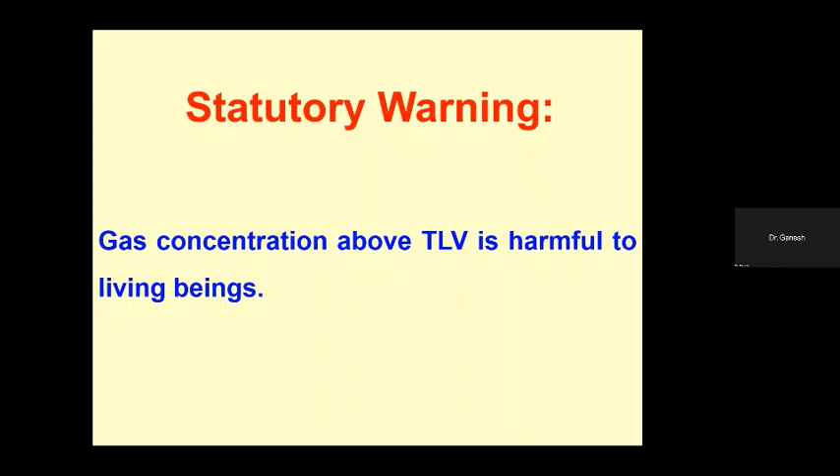Just about the statutory warning: gas concentration present in the environment above TLV is harmful to living beings. This is the introductory part about the gas sensors. So what is the environment? The environment is the imperceptible relationship between nature and the human mind.

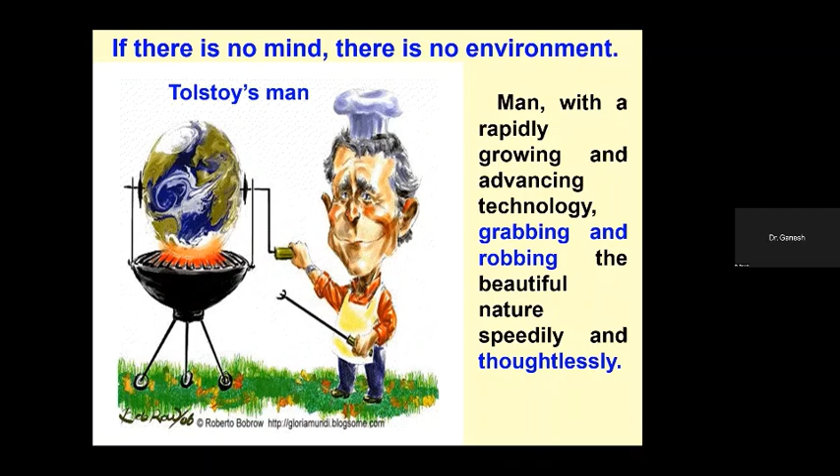And when the atmosphere contains a concentration of pollutants that produce objectionable effects, we call that pollution. Friends, environment is related not to us, but to the human and its mind. If there is no mind, there is no environment. See, this is Tolstoy's man. He is baking the earth as a whole.

That is rapidly growing and advancing technology, grabbing and robbing the beautiful nature speedily and thoughtlessly. So, what is the result of this grabbing and robbing of the beautiful nature? The explosive growth of environmental pollution that we are facing, with many problems such as global warming, the major problem that we are facing nowadays.

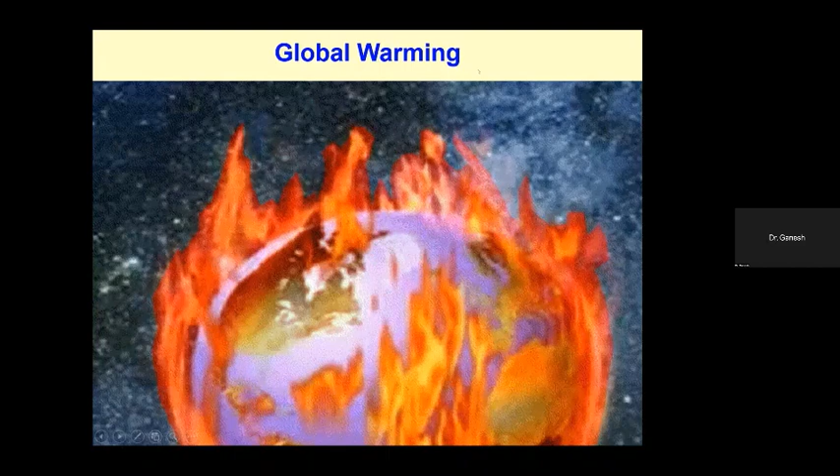So here we come across many gases present in the environment that we must detect. We categorize the hazardous and toxic gases into three types. First is combustible gases; we come across explosion and fire hazard from such gases. Then toxic gases and oxygen displacing gases. So let us see the combustible gases.

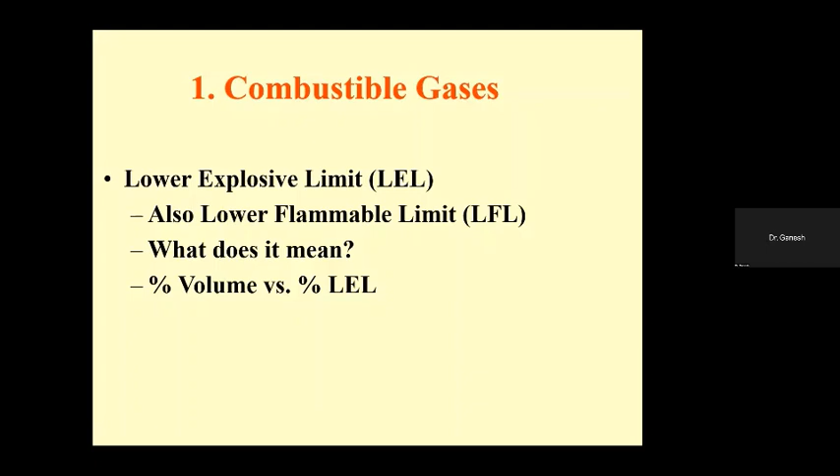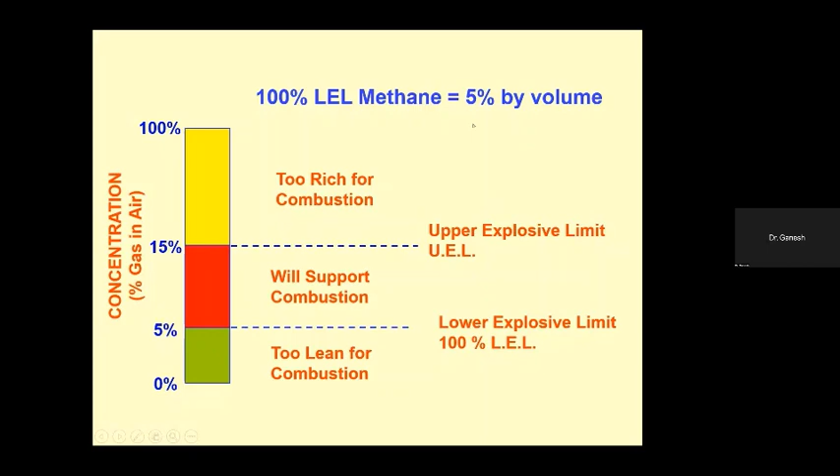For combustible gases, there is one term, the lower explosive limit. When the gas molecules exist in the environment in the specified limit, it is harmful to the environment and living beings. 100% LEL, lower explosive limit, of methane means 5% by volume. From 0 to 5%, it is too lean for combustion, and that is called the lower explosive limit, that is 100% LEL.

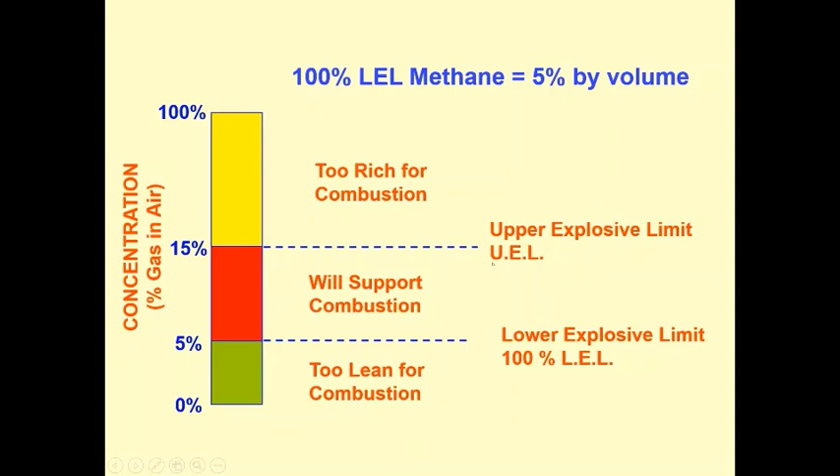If the gas leaks above 5% in the environment, then it supports combustion. Above 5%, the gas supports explosion and combustion. Above 15% by volume, the gas has crossed the upper explosive limit, that is too rich for combustion. The same case is found with pentane. Pentane has 1.5 volume percent as 100% LEL and 7.8% as 100% of the upper explosive limit, UEL.

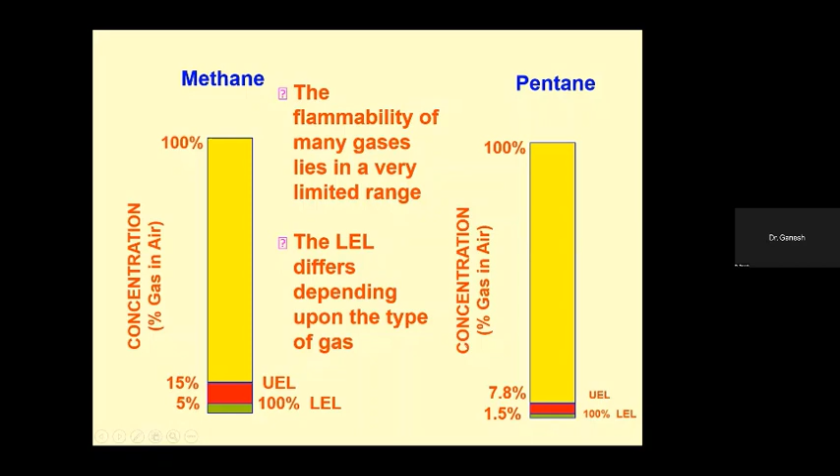Second one is toxic gases, a hazard to human health and life safety. Toxic gas is measured in ppm; it does not affect if it leaks below the threshold limit value, which is measured in parts per million, ppm. 1 volume percent of toxic gas equals 10,000 ppm, or 1 ppm is equal to 0.0001% by volume. So this is about the concentration of the gas which leaks in the environment.

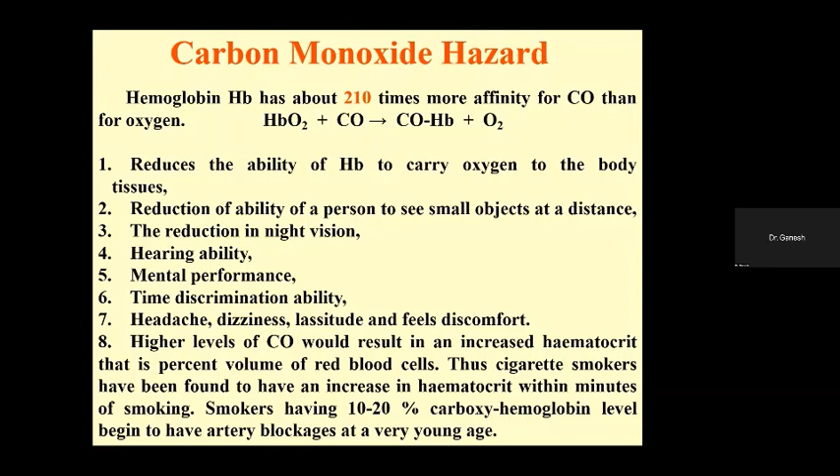We lose oxygen from our body, and therefore we face many problems such as reduced mental performance, hearing ability, night vision, time discrimination ability, headache, and dizziness from carbon monoxide. If 100 ppm of carbon monoxide leaks in the environment, then fatigue and feeling tired. Above 400 ppm, headache within 1 to 2 hours, dizziness, nausea. If it leaks above 3200 ppm, death may occur within 30 minutes. So this must be avoided. Such gases must be detected.

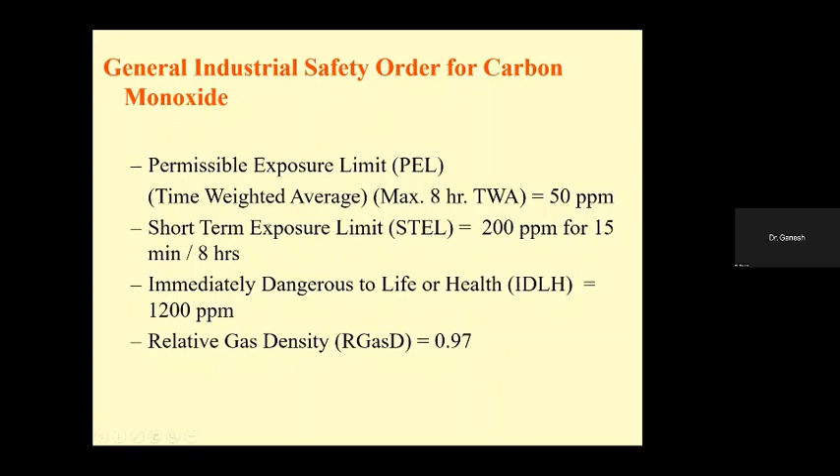So what is the general safety order for carbon monoxide? The permissible exposure limit, time weighted average, is 50 ppm for 8-hour exposure. It means that if a human is exposed to 50 ppm carbon monoxide within 8 hours, it can be tolerated, but above 50 ppm it cannot. The short-term exposure limit is 200 ppm for 15 minutes per 8 hours. If 15 minutes of exposure to 200 ppm happens per 8 hours, it is tolerable. Otherwise, it is dangerous to humans.

Next one is chlorine hazard. Like carbon monoxide, chlorine is also hazardous to living beings. It is used in water purification, sanitation of industrial waste, swimming pools, bleaching of pulp and textiles, manufacture of various chemical compounds, and so many things. When chlorine gas comes in contact with moisture, a hazardous chemical forms, called dioxin, and death may occur if exposed to 100 ppm for a few breaths.

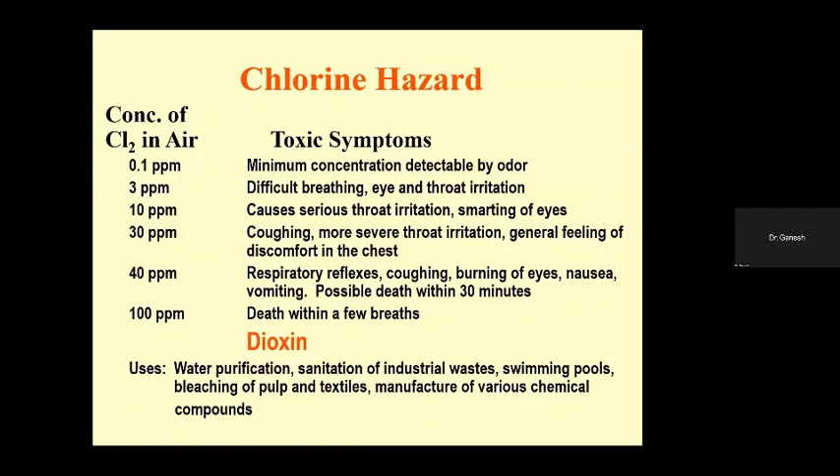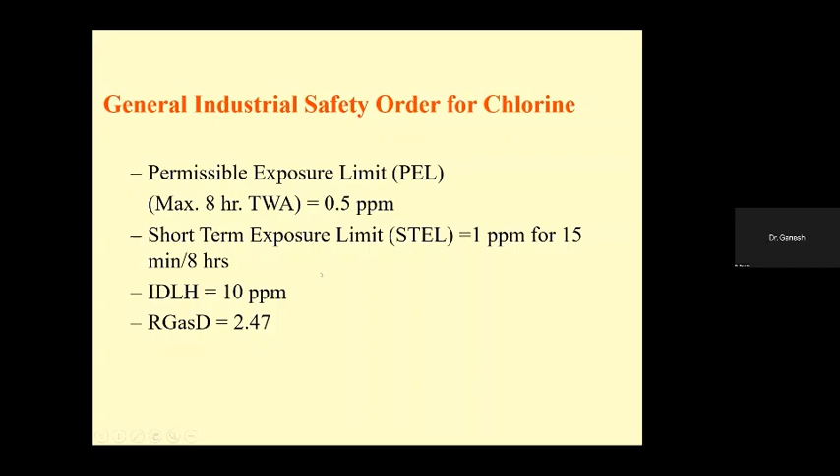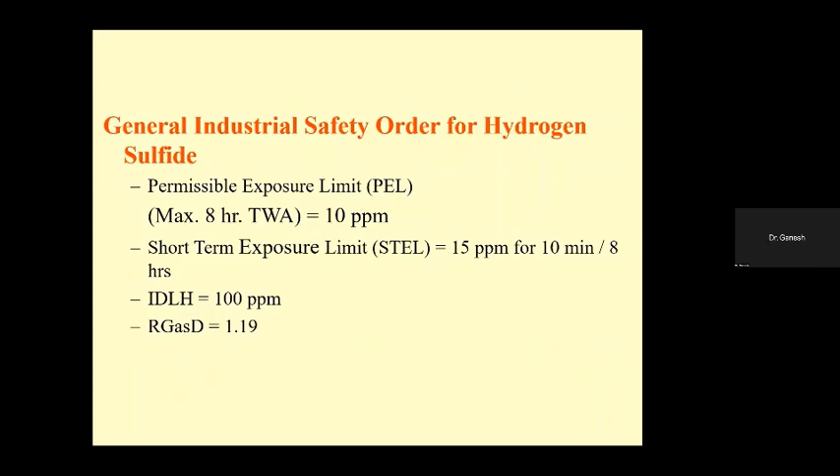Then its permissible exposure limit is 0.5 ppm for maximum 8 hours. Its short-term exposure limit is 1 ppm for 15 minutes per 8 hours. Then hydrogen sulfide. Likewise, hydrogen sulfide 1 ppm also produces irritation of the respiratory tract and odor is detected. Up to 10 ppm, it is allowable for 8 hours exposure, and above it is not tolerable. So its permissible exposure limit is 10 ppm for maximum 8 hours.

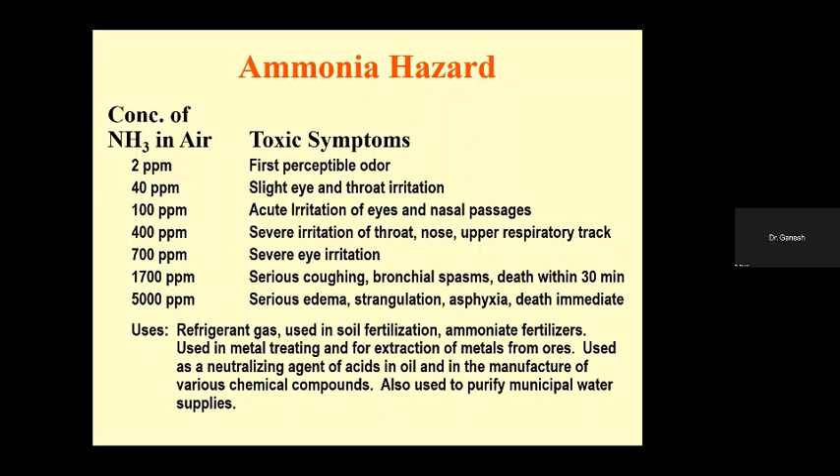Likewise, ammonia 2 ppm, 40 ppm, and many. If ammonia is leaked in the environment by any mistake or by industries, then many side effects on humans can occur. Its permissible exposure limit is 25 ppm and short-term exposure limit is 35 ppm for 15 minutes per 8 hours.

Similarly, gases containing sulfur, meaning sulfur dioxide and sulfur trioxide, may cause difficult breathing, may strain the victim's heart, bronchitis and lung cancer. It destroys plant cells, and many more hazardous effects we come across.

Likewise, ethanol is also hazardous to living beings. Pure ethanol is called absolute alcohol. Ethanol is used for beverages, scientific and industrial purposes. Though it is hypnotic, it depresses the activity of the upper brain, even though it gives the illusion of being a stimulant. It is toxic like methanol, and abuse of ethanol, methanol, or any other alcohol is a major drug problem in most countries.

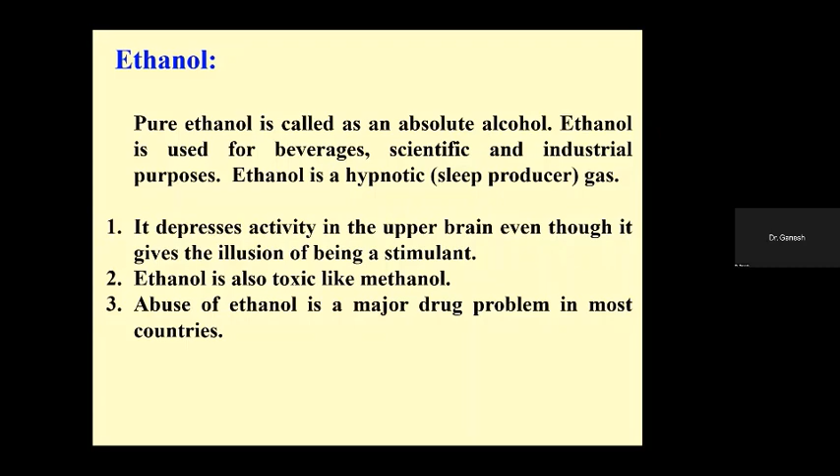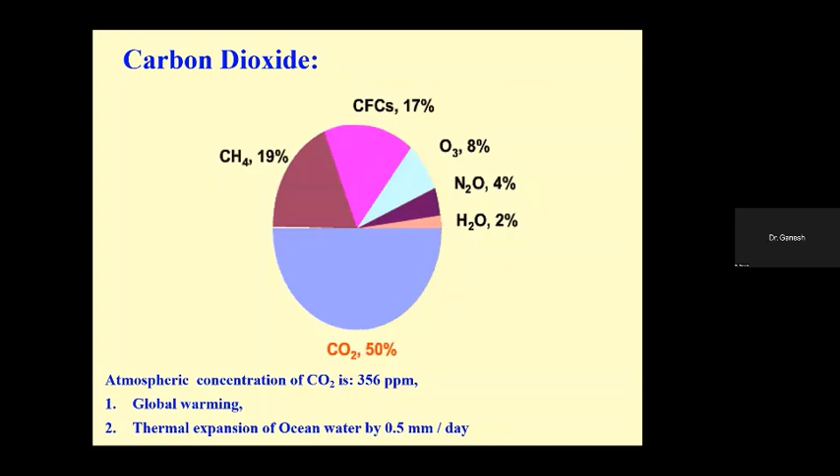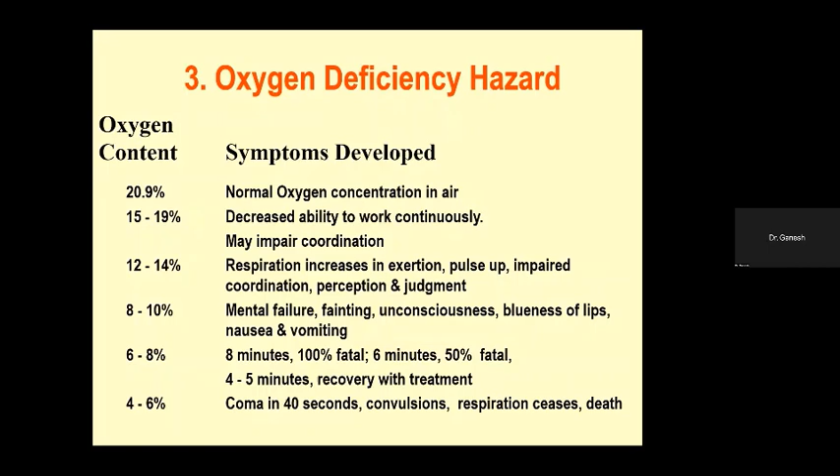This is the carbon dioxide hazards. So, carbon dioxide alone is 50% responsible for global warming. Then oxygen deficiency hazards. Normal oxygen concentration in air is 20.9% by volume. If this volume gets decreased or increased, many more effects we come across. Breathing gear required above 19.5% and below 23.5% oxygen content in air.

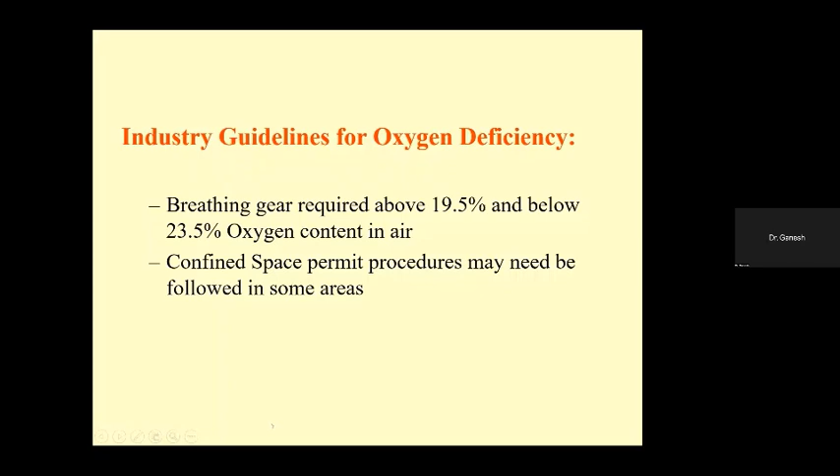So let us see what is a sensor. A sensor is an electronic device which responds to physical quantities, whether it may be gas concentration, temperature, pressure, or displacement. These physical quantities are converted into electrical variations. That device is called a sensor. It is also defined as any device that converts a signal from one form to another form.

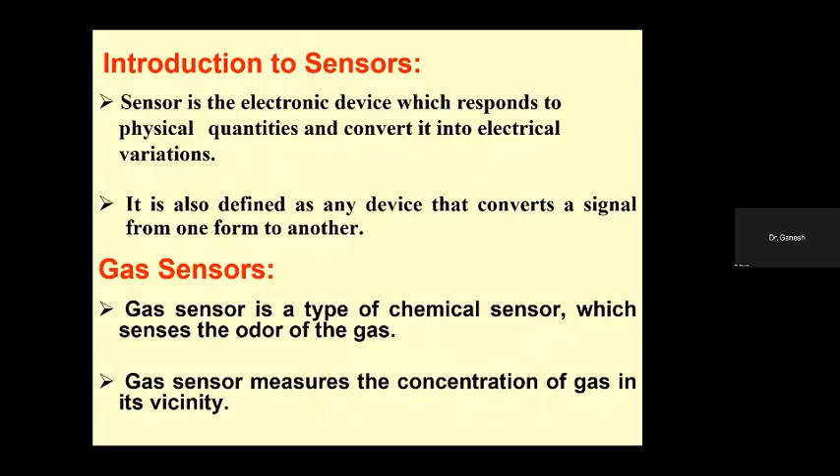And a gas sensor is a type of chemical sensor which senses the odor of the gas. Just as a nose, it senses the odor of the gas and gas concentration. A gas sensor measures the concentration of the gas in its vicinity, meaning exposure. So a sensor is the input device of any system. If we consider the public address system, the input device is the microphone, that is called a sensor.

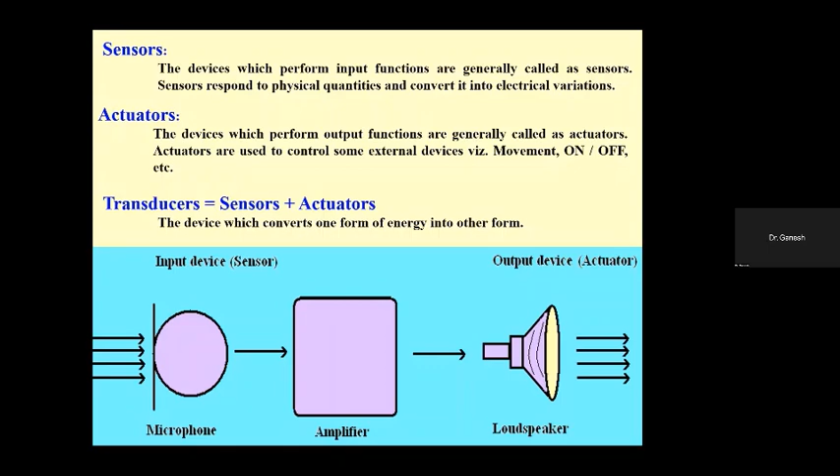And an actuator is the output device in the system. In the public address system, the loudspeaker is the output device, so it is called an actuator. The signal transformation from input unit to output unit is called transduction, and the whole system is called a transducer.

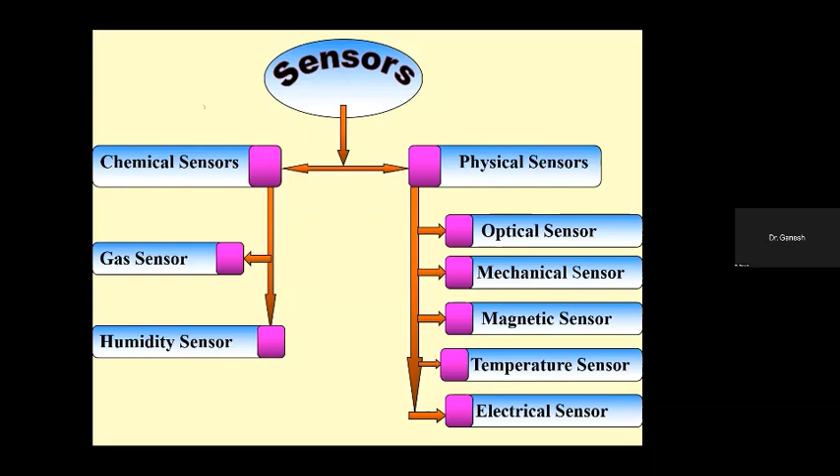So there are a number of types of sensors. Basically two types, chemical sensors and physical sensors. The two types of chemical sensors are gas sensor and humidity sensor. For physical sensors, we find the optical sensor, in which light rays, wavelength or characteristics of light are measured. In a mechanical sensor, pressure can be measured. In a magnetic sensor, magnetic field and magnetic flux are measured. Temperature and electrical sensors are also physical sensors.

So what is the need of these sensors? We come across a few of the cruelest episodes, like the methyl isocyanate gas leaked in India on December 2, 1984 at the Union Carbide plant in Bhopal. If a well-developed gas sensor was there, we could avoid such horrifying or disastrous events. Next is the horrifying explosion of a gas cracker plant on November 5th, 1990 at Nagothane in Maharashtra, India. A number of cooking gas explosion accidents happen in kitchens all over the world.

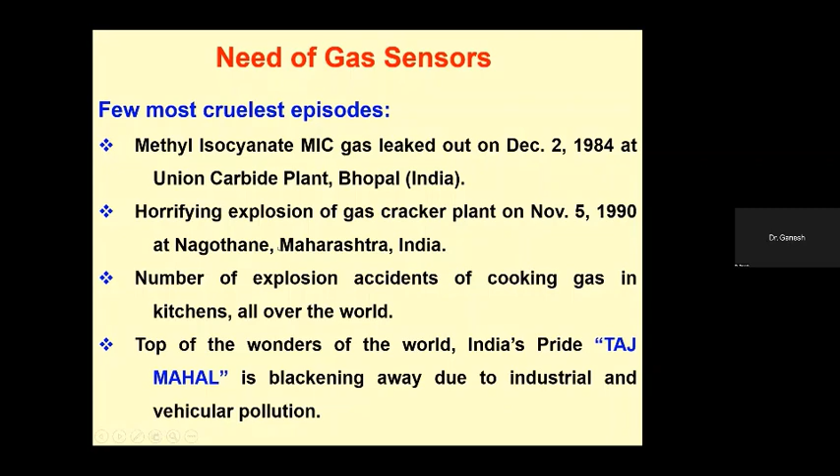One of the wonders of the world, India's pride, the Taj Mahal, is blackening due to industrial and vehicular pollution. To minimize such gas emission effects, to minimize health hazards, to avoid the hazards of global warming and to avoid the cruelest episodes, it is necessary to detect and control pollutants in the environment in the form of gas or moisture. So various nanomaterials are used in sensing.

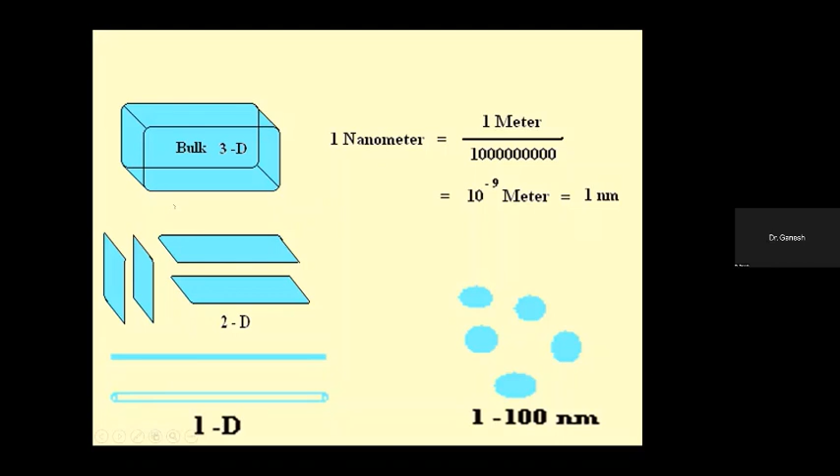Here we have zero-dimension nanoparticles, meaning nanoparticles having size 1 to 100 nanometers. Then one dimension means one dimension of the system is bulk, in terms of microns, while the other two dimensions are reduced to nano size. These are called one-dimension nanorods or nanowires. This is the nanowire and this is the nanorod. Then we come across 2D materials, meaning any two dimensions are bulk and one dimension is reduced to nano size. So this is 2D and this is the bulk 3D material.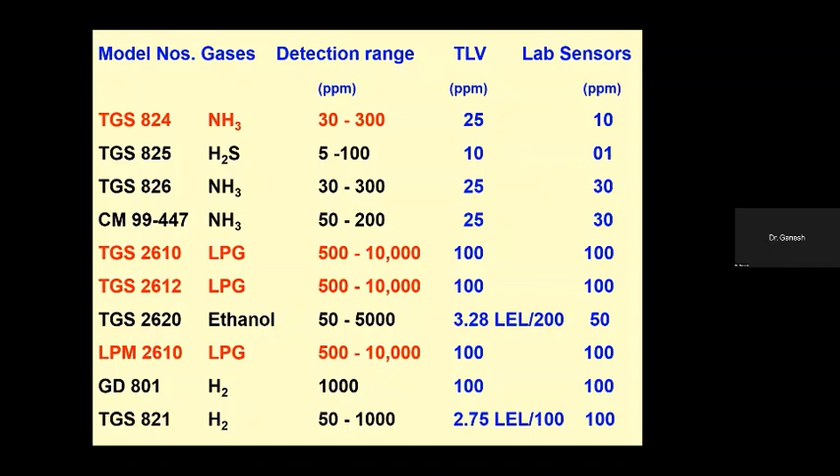So this is my main aim, to develop these sensors. Many techniques are available to fabricate gas sensors: thin films, thick films, and pellets.

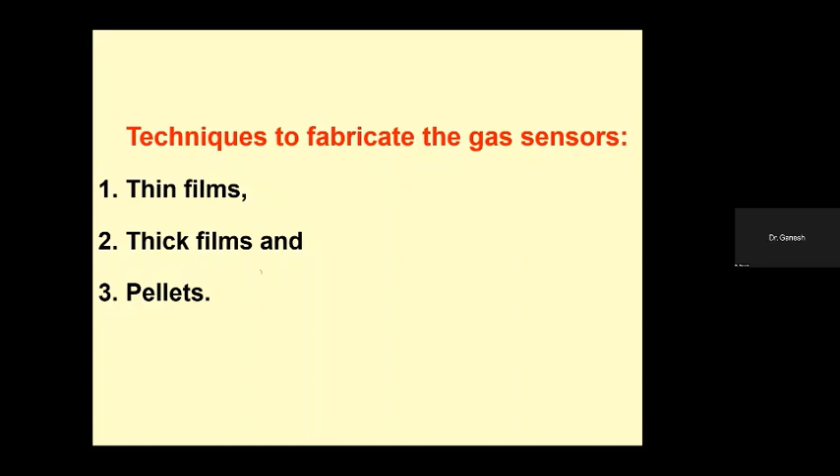Out of these, we prefer thick film technology because it is low cost and has high porosity. Since gas sensing is a surface phenomenon, we need porosity on the surface of the film, which we can manipulate using thick film technology.

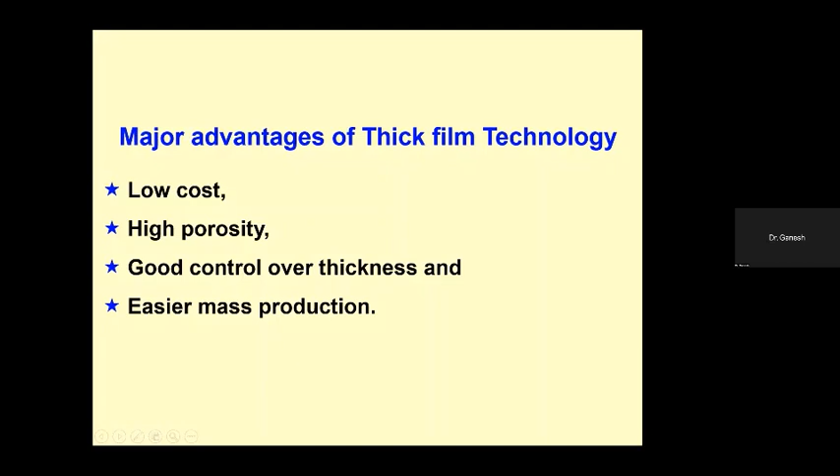Then there is good control over the thickness of the film. We can fabricate films of different thicknesses, and easier mass production is possible.

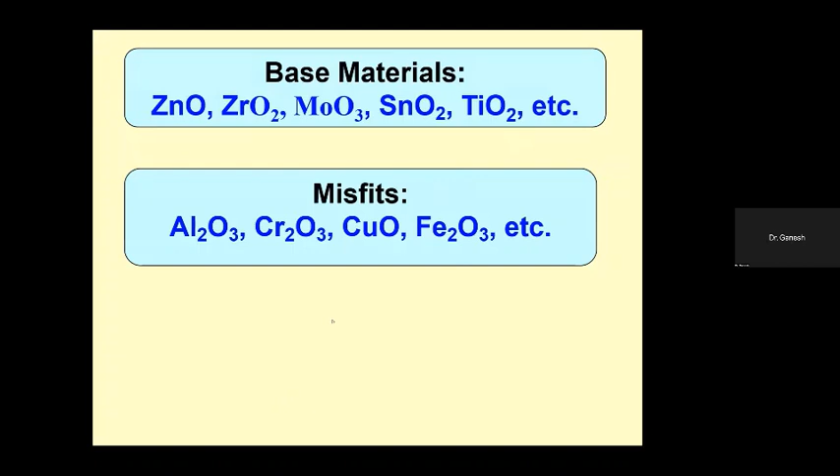To modify such base materials, some misfits are used, such as alumina (Al2O3), chromium (Cr2O3), and Fe2O3, and a number of oxide materials are used as misfits in the base materials so that we can modify them and get the proper results for gas sensing.

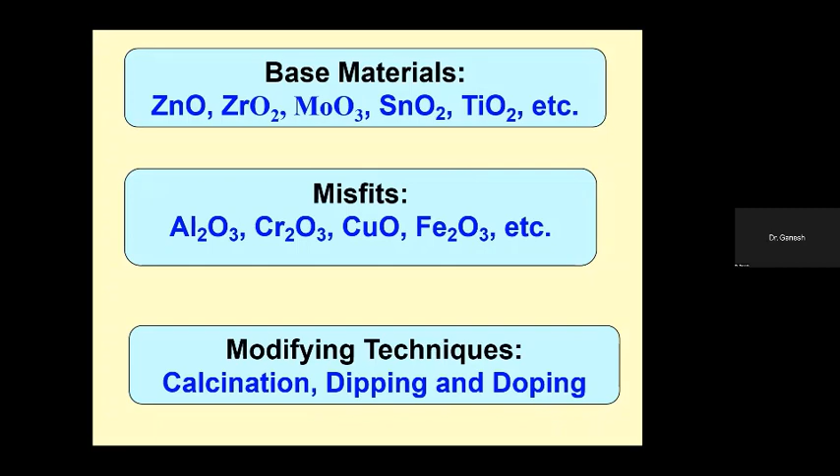Here we have three modifying techniques: calcination at higher temperature in the muffle furnace, dipping the film of pure material in the misfit solution, and doping, where the misfits can be added mechanically in a very minute quantity to the base materials. These are low cost techniques to modify the gas sensors or modify the sensing performance of different materials. First is the modifying technique of calcination.

If the material is calcined at high temperature, taking the example of ZnO, after calcination above 500 degrees Celsius, it liberates its oxygen. Oxygen is removed and the material becomes oxygen deficient.

The theoretical stoichiometric proportion of zinc and oxygen in ZnO is 80.34 and 19.66. This is theoretical, but practically, once we synthesized the material and analyzed it with EDS analysis, we find that zinc is in excess, at 91.95, and oxygen instead of 19.66 appears as only 8.05.

This means the material is oxygen deficient, and as it is oxygen deficient, fewer electrons are captured by the oxygen species, so more free electrons are available to carry current in the material, making it N-type. That's why ZnO with more oxygen deficiency shows more N-type behavior.

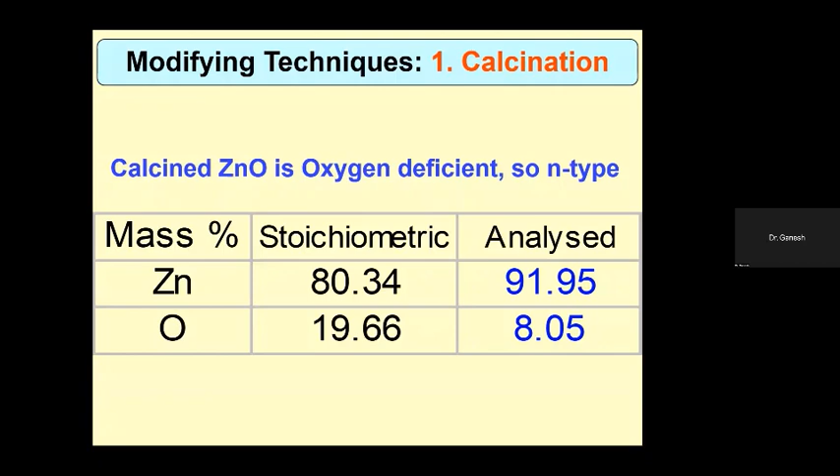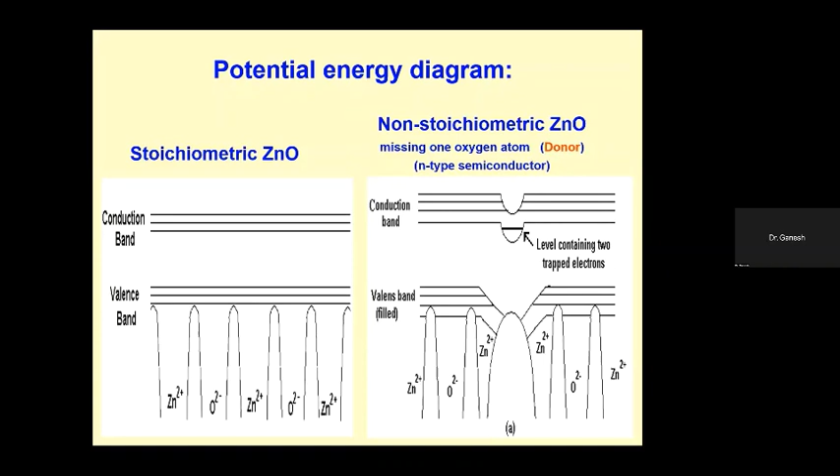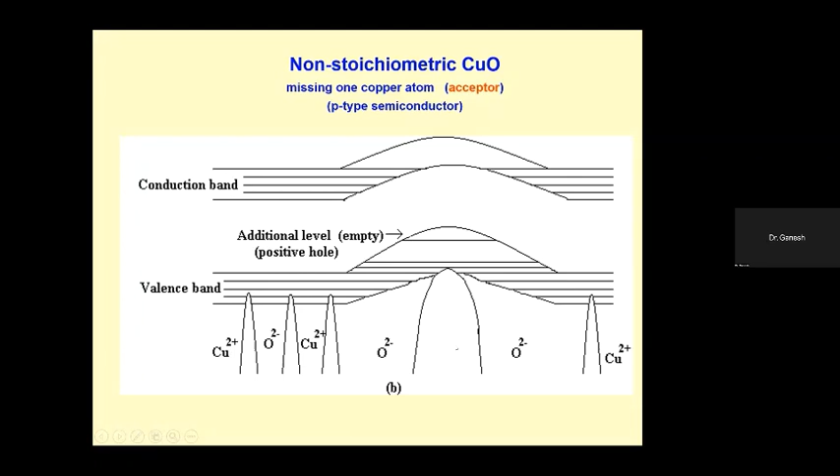This missing oxygen atom creates a donor level. In case of CuO, one copper atom gets evaporated, and O2- forms this type of shape, so this is a P-type semiconductor.

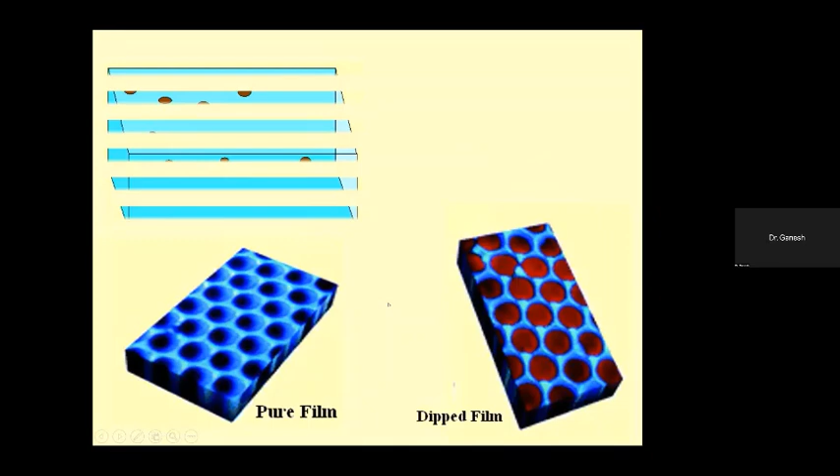Here is a picture of the dipping and doping techniques. This is the energy dispersive analysis by X-rays of the material doped with copper in ZnO. Here also we find the materials have fewer oxygen atoms, and copper is added as copper oxide.

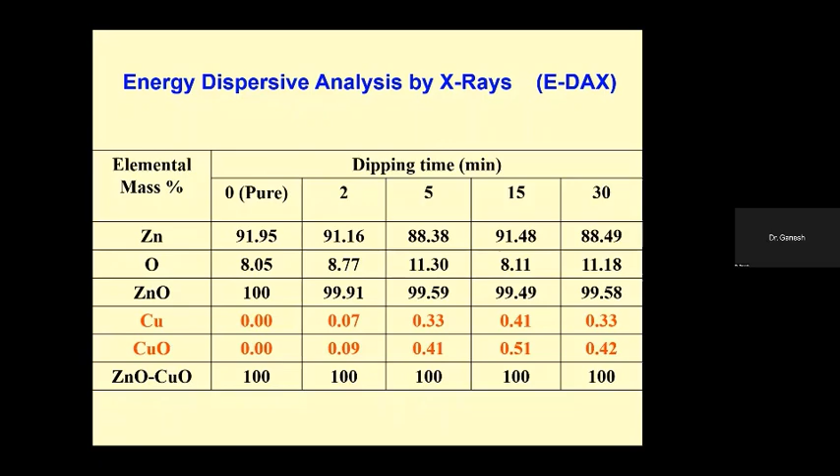For 2 minutes dipping there is 0.09%. For 5 minute dipping it is 0.41, for 15 minutes it is 0.51, and for 30 minutes it is 0.42. In this way we can introduce copper oxide atoms into zinc oxide using the dipping and doping technique.

The third modifying technique is doping. Doping means adding one solution to another and forming a compound of different materials. So this is just about the material synthesis.

Material synthesis has been done in our laboratory using the microwave aided ultrasonication technique. We have many more techniques available to synthesize nanomaterials, but in our laboratory we use this low cost technique. This is the ultrasonicator, having a power of 800 watts, with a rod having a disc situated at the tip, and its frequency is 40 kilohertz.

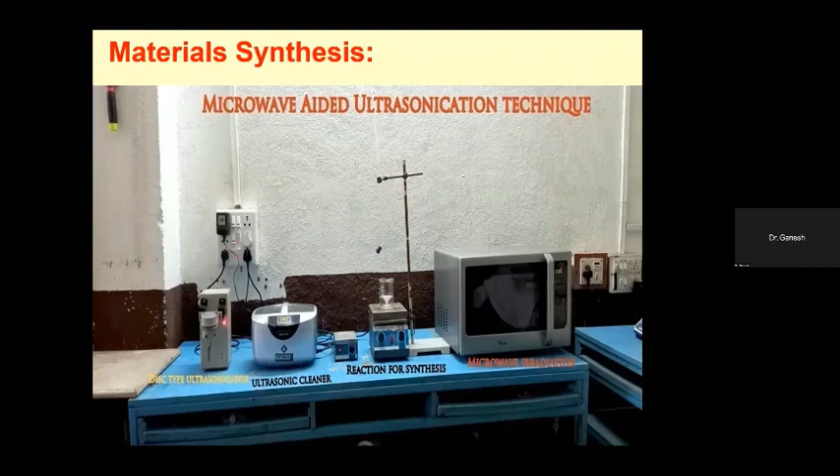This is the ultrasonic cleaner, cleaning at a frequency of 24 kilohertz. This is the assembly of the actual reaction that happens on the magnetic stirrer with hot plate, and this is the microwave oven. So the microwave assisted or aided ultrasonication technique is used to fabricate the nanomaterials.

The route of material synthesis is an aqueous alcohol solution. First we prepare distilled water and propylene glycol in 1:1 ratio. Then zirconium oxychloride is added. If we have to find the film of zirconium, zirconium oxychloride at 0.1 molar is added to this aqueous alcohol solution.

Then ammonia is added dropwise into the solution, which is held on the magnetic stirrer with hot plate. Ammonia is added until the pH becomes 8. That's how we get the particular size of the material.

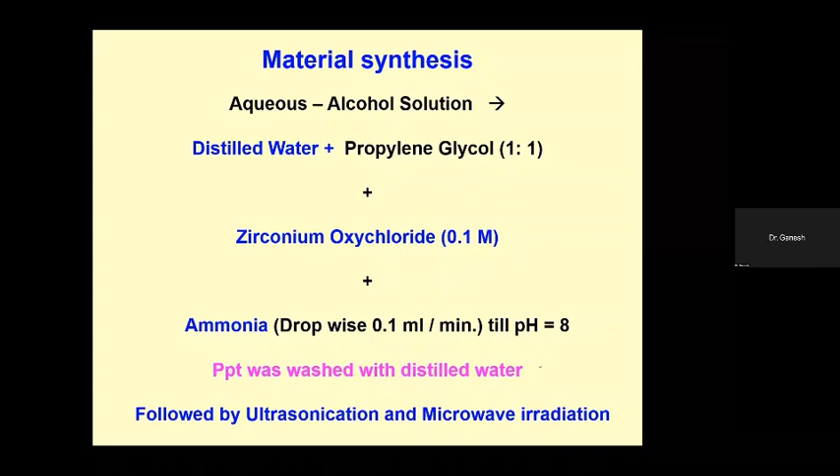Then this precipitate was washed with distilled water, followed by ultrasonication and microwave irradiation. Then we get the nanomaterials of a particular shape and size.

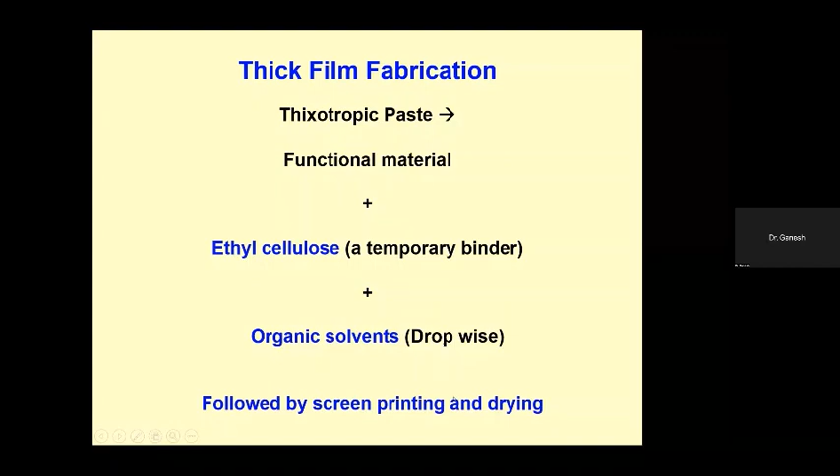Once the nanomaterial has been prepared as dry powder, the thixotropic paste may be formed by following this route with the functional material. If ethyl cellulose and organic solvents are added to the functional materials, followed by screen printing and drying technique, we can get the thick film. This is the screen printing setup, and this is a screen.

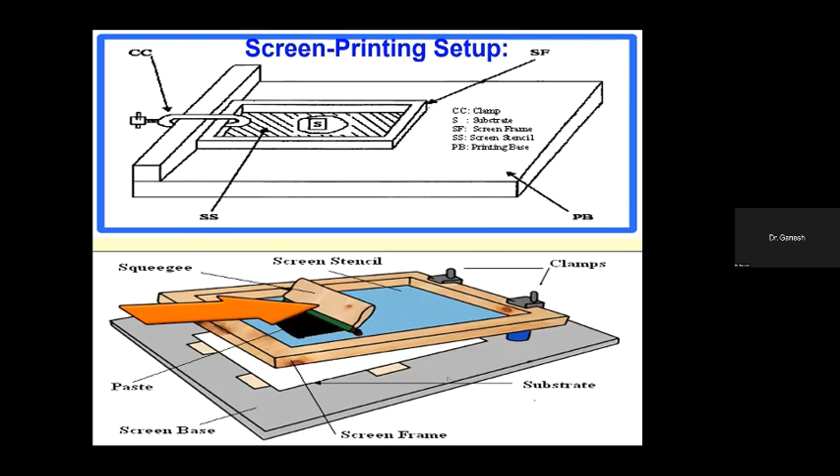The screen is held with this clamp, and here the stencils are present, and just below the substrates are kept. Once we press this screen with the squeegee like this, this is the screen printing mechanism. The squeegee can push material through these channels of the screen opening. Then the material gets passed through the screen opening, and like this, the sensor material gets printed on the substrate.

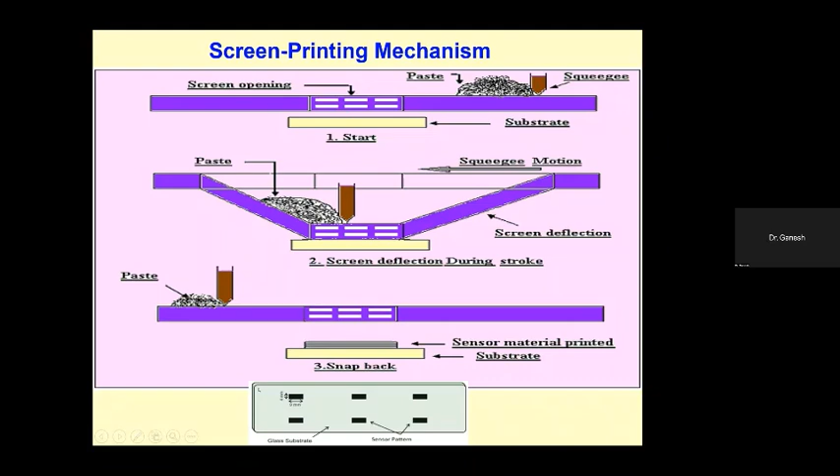This is the sensor material. These black points are the sensor elements of size 4 mm to 9 mm.

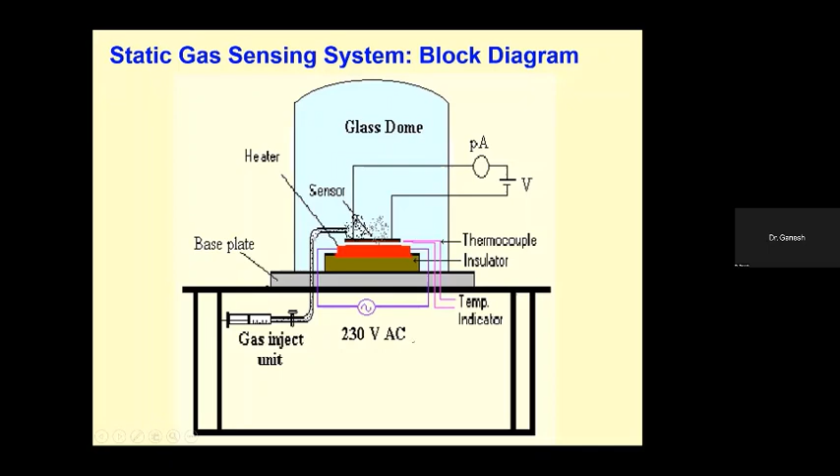The volume of the gas can be controlled manually, or otherwise by a flow meter. Manually, it is achieved as shown in this chart. We have the glass dome of volume 15 liters. If the gas exposed on the film is 1.5 ml, then it is 100 ppm gas concentration. If it is 3.0 ml, then it is 200 ppm. By calculating, the volume of gas in ppm equals injected volume of gas divided by volume of the glass dome, which is 15 liters, multiplied by 10 raised to 6, so that we can convert this volume of gas into ppm.

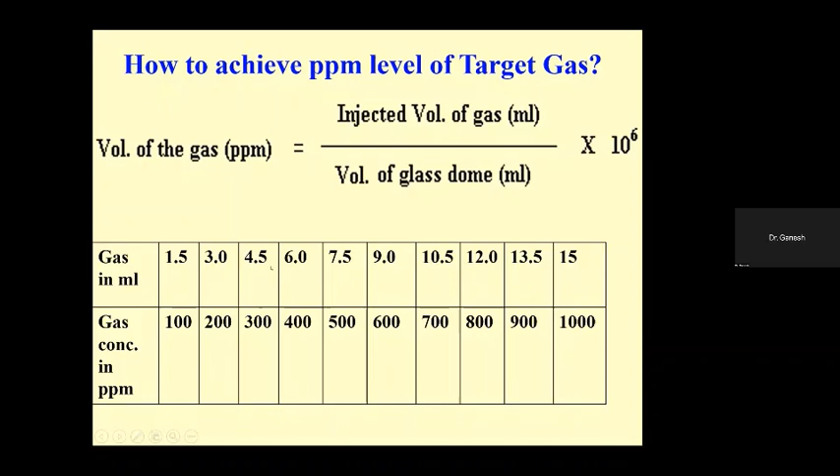We have important measures of gas sensing performance. The first is gas response. Before exposing the gas, we measure the current, and after exposure of the gas, we measure the current, taking the ratio of the gas currents in the gaseous medium and in the air medium. By taking this ratio, we can get the gas response. Ideally, the gas response should be high for any material, and selectivity should also be very high. Even if gas response is medium or somewhat less, selectivity must be high, because the gas sensor should give response to only a selective gas and not more gases. So selectivity is the ability of a sensor to respond to a single gas in a mixture of a number of gases.

Next is response time. The time at which the gas exhibits more response, up to 90% response, is called response time. Ideally, that response time should be in terms of a few seconds, not a few minutes. Then recovery time. Once the gas is exposed on the material or sensor, its chemical constitution or composition gets changed, but after firing again, that film should come to its original chemical status without any processing. That is called recovery, and that time should also be very low, ideally a few seconds, not minutes.

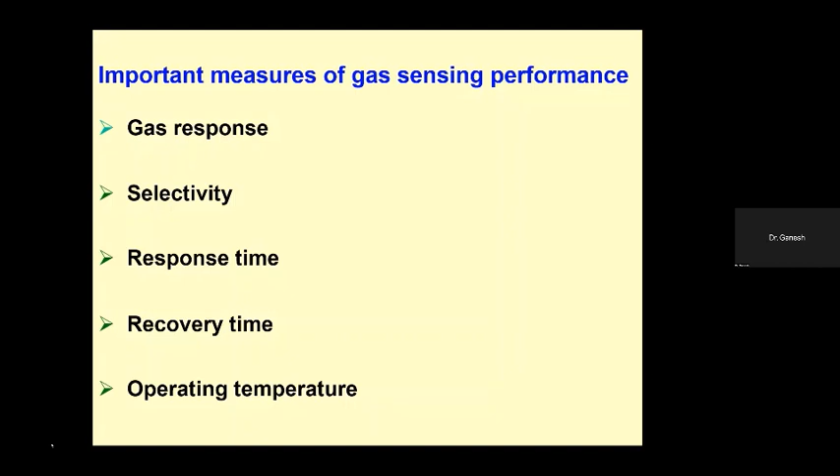Operating temperature: many gas sensors exhibit gas response over a temperature range from room temperature to higher temperatures, like 300, 350. So the temperature at which the sensor responds to a particular gas with maximum amount is called the operating temperature. Few room temperature sensors developed in our laboratory are ammonia, chlorine, H2S, LPG, and hydrogen sensors. Few sensors operable at higher temperature, also developed in our laboratory, are ammonia, LPG, hydrogen, and ethanol sensors.

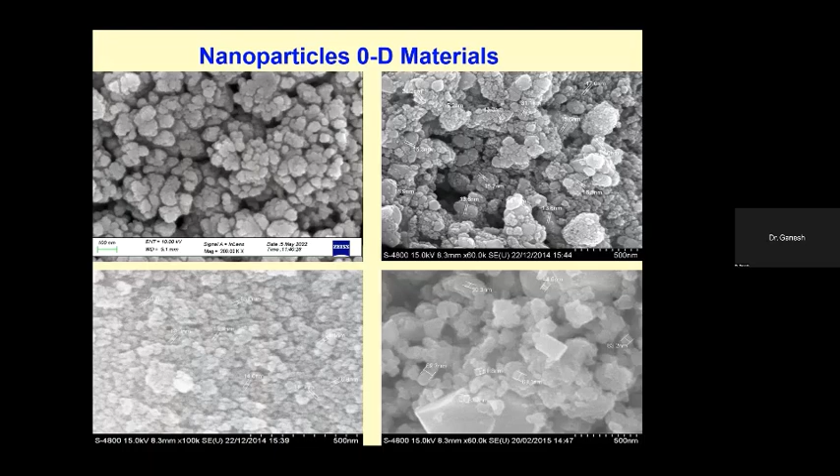Here we have some scanning electron microscopic micrographs for 0D materials. These are nanoparticles of size ranging from 5 nanometers to 20 nanometers and even more. These pictures show the nanoparticles, that is, 0D materials.

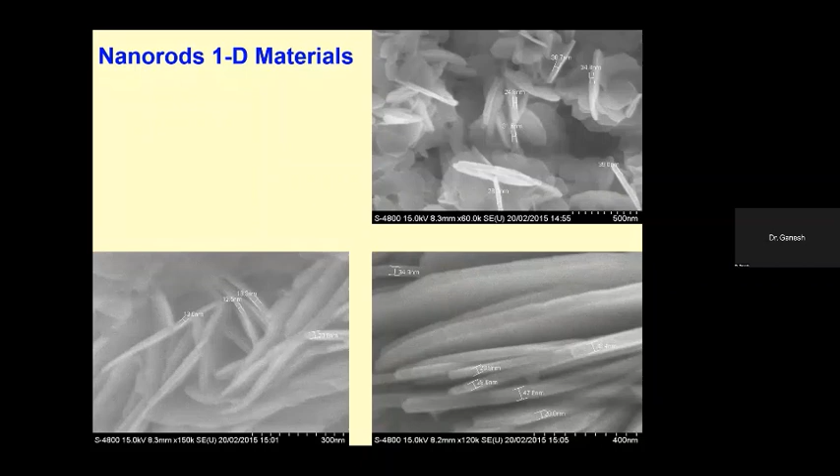Nanorods. It is a very strange event that you see how the nanorods get formed. That is, this process is incomplete. If we control this in the proper way, then we can get such pictures during the formation. And if we give some more time, then the nanorods like this get formed during the synthesis. So this is also a 1D material.

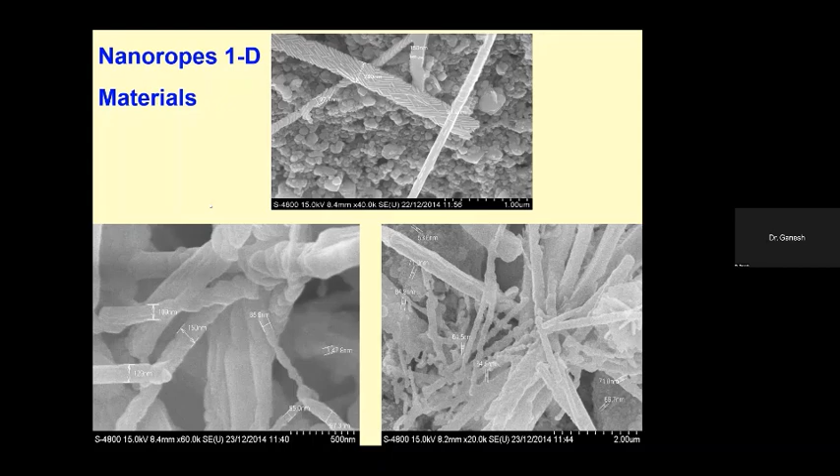Sir, Professor Patil. Yes, sir. So could you make a quick summary? Yes, sir. Thank you, sir.

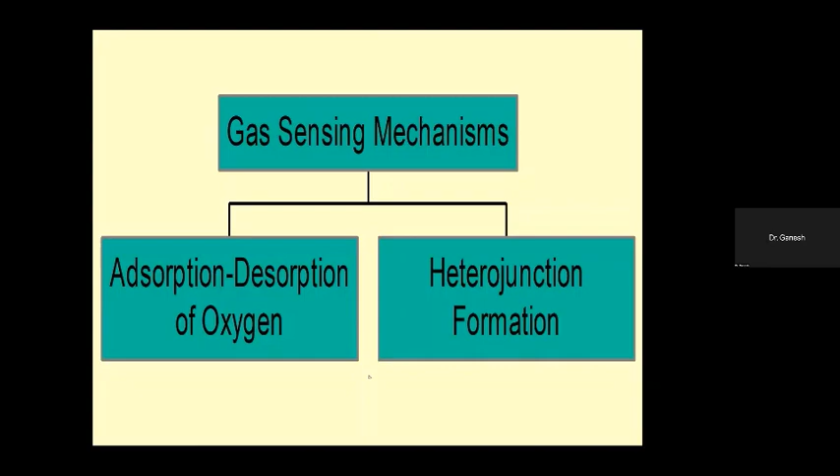So here we have two gas sensing mechanisms: adsorption and desorption of oxygen, and heterojunction formation. Before exposure to the gas, oxygen can capture 2 electrons from the material and becomes 2O minus. These appear on the surface of the sensor, and after exposure, this oxygen liberates the electrons into the material.

This is another mechanism, heterojunction formation. Before exposure to H2S gas, n-SnO2 and p-CuO, that is a PN junction, shows very high resistance. This is the resistive model of the sensor. Once the H2S gas is exposed, p-CuO gets converted into conducting CuS and ruptures the NP junction, giving very low resistance.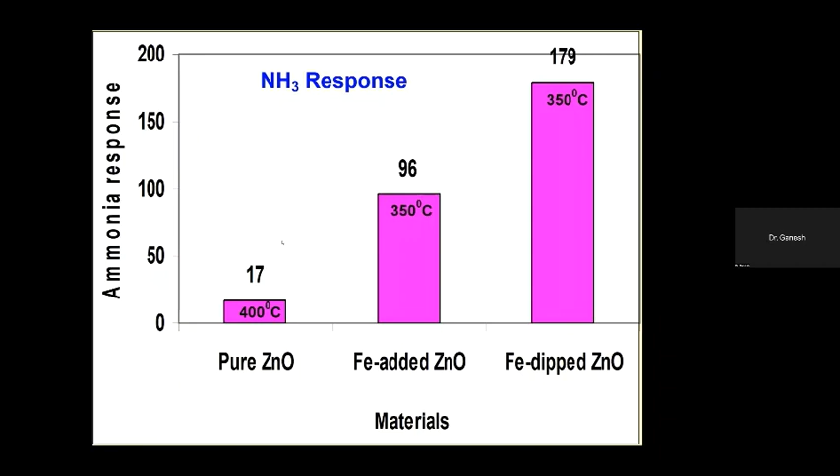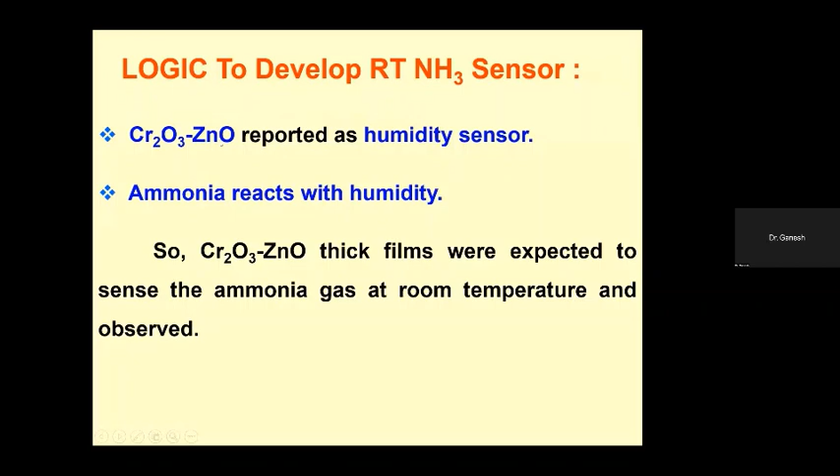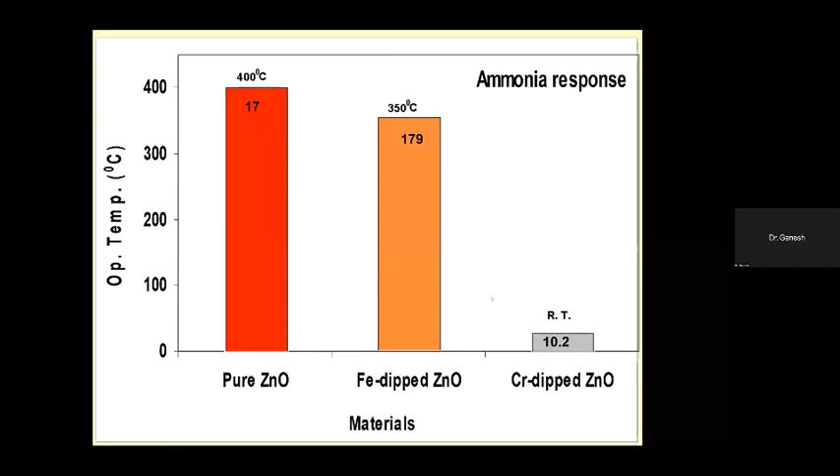So we worked to obtain a room temperature sensor, and we got the room temperature sensor, Cr2O3-ZnO, reported as a humidity sensor, and that sensor responds at room temperature. So the Cr2O3 plus ZnO sensor gives a response at room temperature. So this is about the output of this laboratory.

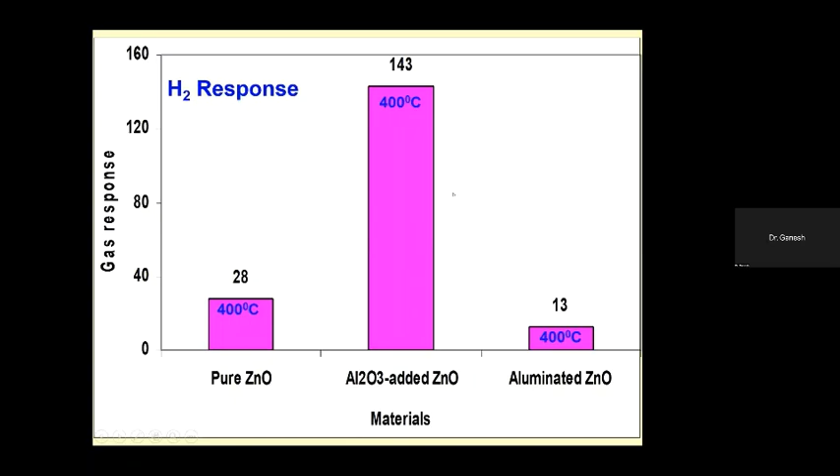Here the particle size during synthesis with doping concentration is presented. For 0 weight percent, we have a particle size of 2.4 nanometers. For 1 weight percent, it is 5 nanometers. At 3 weight percent, it is 5.4, and at 5 weight percent it is 7.03 nanometers. So the particle size depends upon the doping concentration.

This is the optical band gap. Here for Ti 1%, 3% and 5%, we have observed the energy band gaps. They are 2.36 electron volts, 2.30 electron volts and 2.21 electron volts for 1 weight percent, 3 weight percent and 5 weight percent respectively.

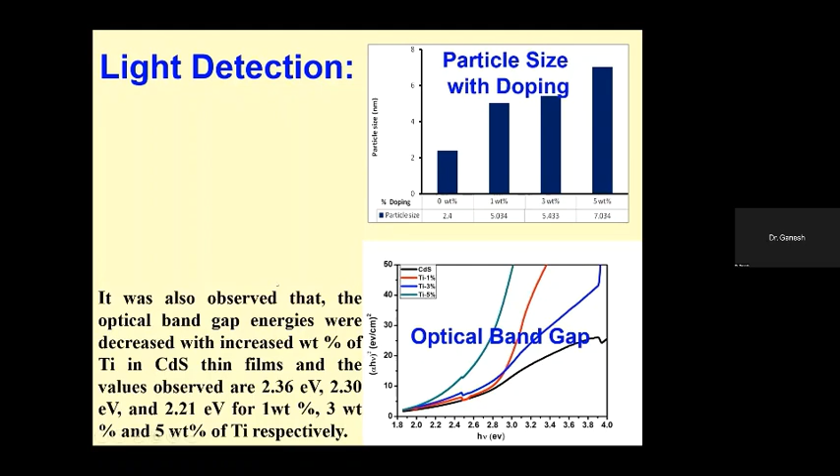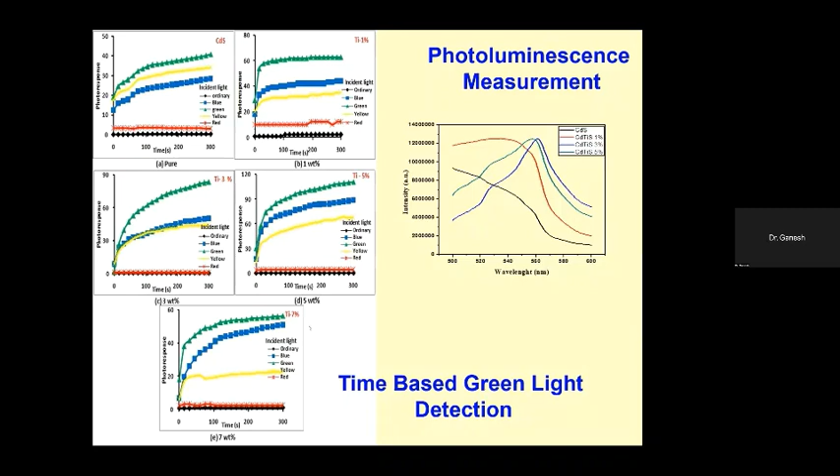So green light detection of the various materials is shown in this picture, and thermoelectric power measurement is also presented like this: thermo EMF versus the change in temperature.

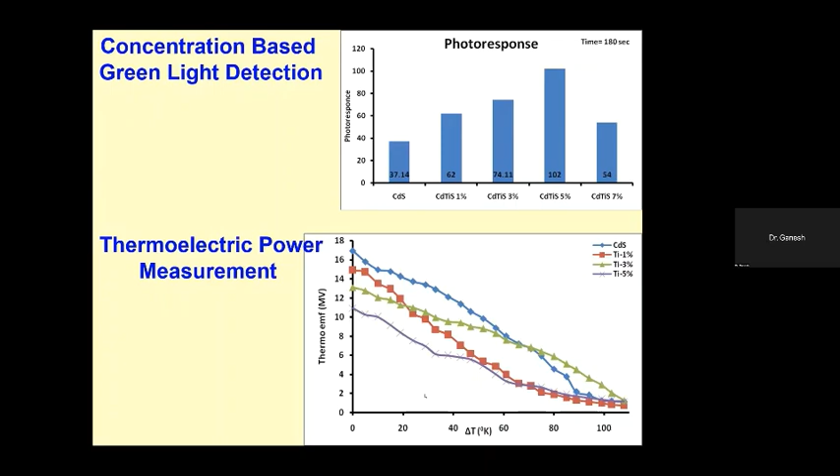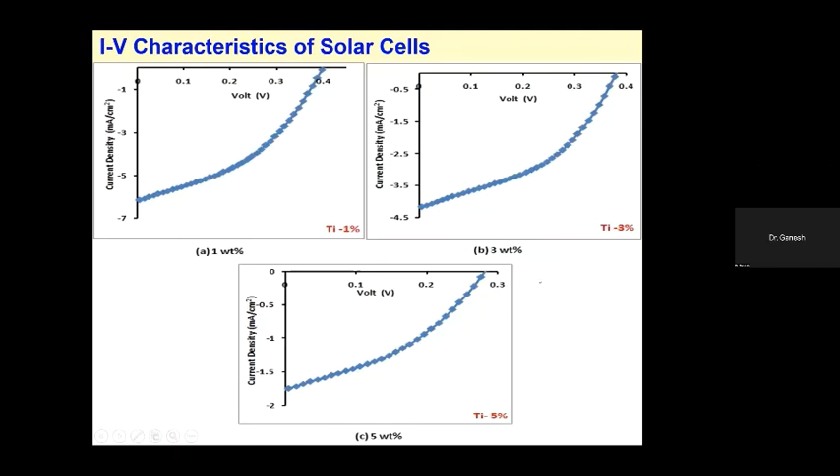So we have this type of IV characteristics of solar cells, showing responses to different situations and different solar radiation at different wavelengths. So somewhat innovative work we are doing in our laboratory.